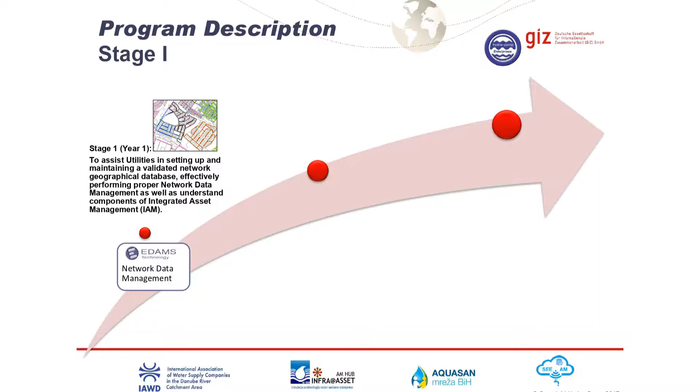So we have stage one, a number of utilities completed stage one. And what exactly did they complete? An initial assessment we did, setting up on the cloud, data collection, dissemination, and monitoring and control. So what we've done, we took GIS data and we converted them to EDAMS.

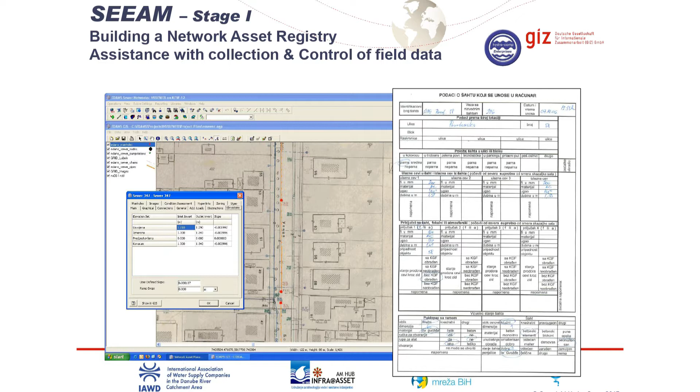We assist them through the hubs to the collection of field data or conversion of any kind of graphical data. This is a nice example from Kragujevac. It's a rather big and complicated network. Kotor is also a favorite. We continuously assist with resolving discrepancies, problems in the network, new data capturing, and so on, and providing monitoring and reporting on a weekly basis.

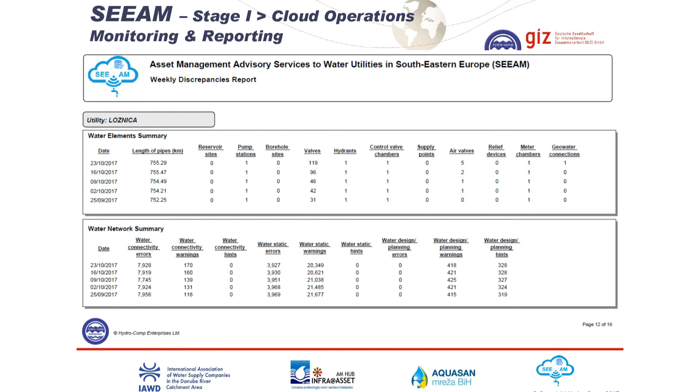So these are the topics that were basically covered in stage one: the cloud, the collection, discrepancies, and reporting. These are topics that have just been mentioned but not really covered in stage one, that being the zoning and the reporting manager. At some stage we will have to revisit them and say more about how to use the reporting manager, how to export data, how to utilize the zoning.

Zoning manager, reporting - very useful tools, to discuss further.

There are a few other topics we only mentioned but didn't cover, and I call them pilot topics. This is facility management and sewer networks. I heard some gentlemen mentioning sewer networks a bit earlier. Now let me clear it up. This project and the funding we have from GIZ is for water networks. It's not for sewer networks.

As an appetizer, just to explain that EDAMS actually works for both water and sewer, we asked some of the utilities to come forward so we could convert the sewer networks. But keep in mind there's a potential ToR extension, so we're keeping it on the back burner - perhaps over the next 1.5 years we'll come with a new proposal, with a new ToR, just for sewer and treatment works.

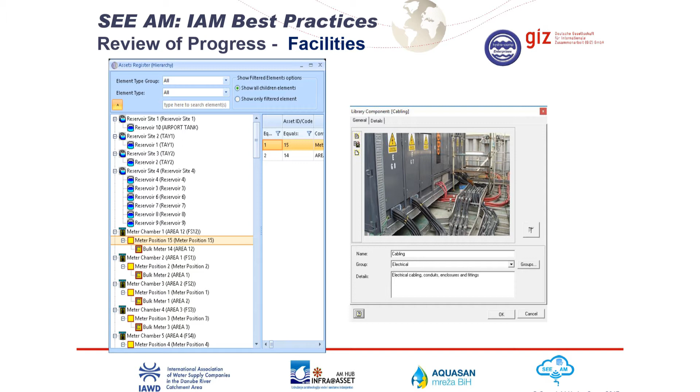Together with that, if we address the sewer, we have to address facilities. Facilities mean primarily treatment works - whoever has treatment works, and whoever has any kind of other facilities, and manages these facilities. So we see that as a package that hopefully will form a follow-up ToR just addressing sewer and facilities.

So one thing I want to tell you today is that apart from the project going on for the next two years, we're actively looking for ways to extend it. So we don't see it, as we explained to you in the past, as just a project. We see it as something long-term.

And long-term means that from our side, the service of the system will continue as you have it now, but that must go hand in hand with additional CD measures, trainings, and so on. So we will see what formula will convince our GIZ partners to extend the project. The sewer and the treatment plants are a logical follow-up.

It was mentioned by many of you. So yes, this is one potential avenue we're exploring, and definitely we're going to include it.

Facility management for us is very important, it's very big, and touches on another subject we haven't discussed at all, but we're going to discuss next year: municipal assets, because your assets belong to the municipality. So that might be a good opportunity to open another big discussion on how we bring in the municipalities and how they become actually part of the project.

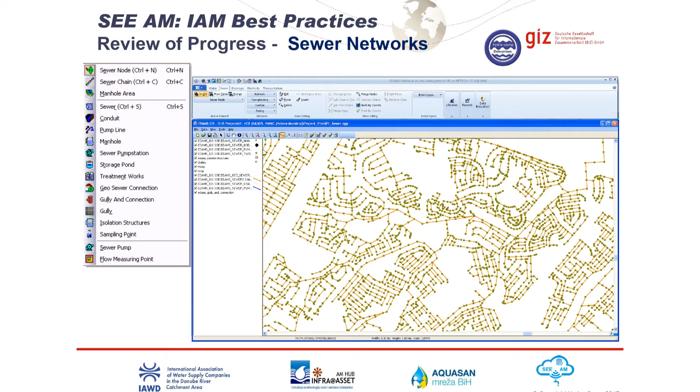And the sewer networks - okay, that is a synopsis of stage one. That's what we did in stage one.

That's what we would like to do, and that's what we have done. Then we come to stage two, which is the maintenance. And this was quite an ambitious stage that's supposed to cover all these things.

Now, I would like to say that maintenance is extremely, extremely important. There are a number of utilities that ask me, we don't like maintenance, we do what we do, just leave us alone. Can we skip to platinum stage and skip maintenance? The answer, in theory, yes. You could go from stage one to stage three because to set up a DMA, you don't need to have done maintenance. But it's not the correct approach.

You can't ignore maintenance. If we're going to do an asset management program ignoring maintenance, we're basically fooling ourselves, because the heart of asset management is maintenance. So to say that we're going to skip maintenance is not giving the right message, and also it stops what we want to do this year, which has to do with rehabilitation.

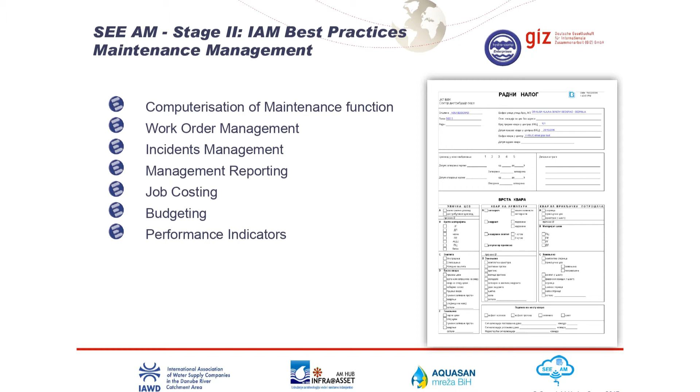But we had quite a tall order for maintenance, and some of you might be frustrated because you didn't implement as fast as you would like. It's a difficult topic for one additional reason: maintenance involves changing procedures on the ground, changing the way people do their work.

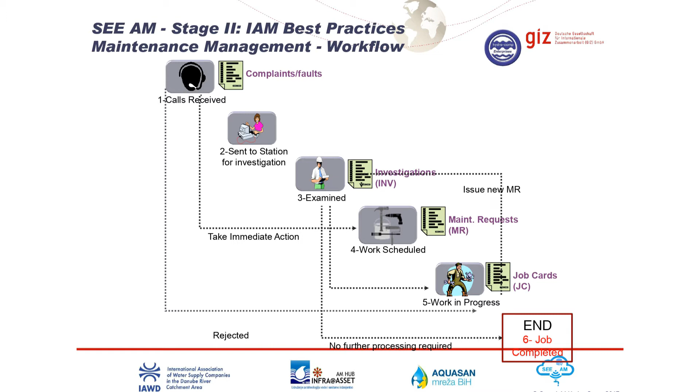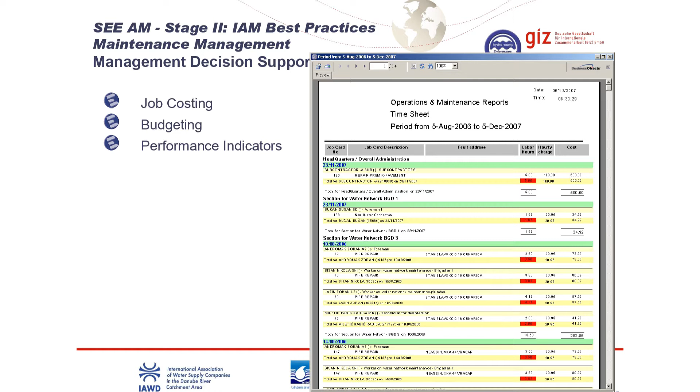I was recently in a municipality in Greece where for the fourth year, me and the director tried to convince everybody there to start using maintenance. That was déjà vu, we did exactly the same presentation, exactly the same thing for the fourth year in a row. So yes, it needs a certain attitude, it needs a certain management style.

It has to do with a lot of things within the utility which is not in our control. On top of it, you must know that these systems are implemented on premises or on the cloud. When implemented on premises, we come on the premises and we see what you're doing, and we help you replan your routines. On the cloud, we have no control whatsoever. We give you access to the system and, apart from some support, we hope for the best.

We don't actually actively get involved in the reorganization of your utility. We give you advice, we tell you what you should do, but we don't get involved. If you really want to enforce maintenance, the word is enforce, at least at the beginning, because there is resistance. Any kind of computerization that affects workflows creates resistance. Many utilities might be frustrated because they have a slow path to activate maintenance, but that doesn't matter. You have to be persistent and make sure these things are enforced.

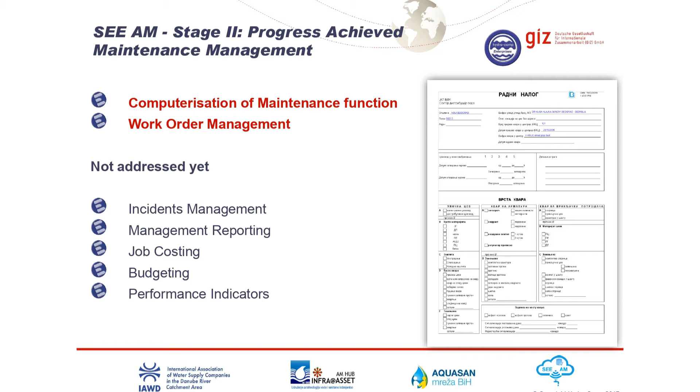The items we haven't touched so much: proper job costing, managing, budgeting, and performance indicators. We want to revisit these items. We haven't addressed them really because only now some of the utilities are starting to properly capture complaints and incidents and close the job cards. So this was maintenance management, stage 2, and we come to stage 3.

Stage 3, we introduced two aspects: non-revenue and operation. Now, I say introduced because for various reasons we didn't make much progress.

Some of the utilities are quite good, they're persistent, they have zones, and they're getting there. We expect that some of the utilities will manage to balance most of the zones this year, but it's an ongoing effort. This is the introduction - the two sides of it.

First of all, operations. We made an introduction that you have to capture all your logs. We want you to computerize the logs. That's something, again, we need to rediscuss. For utilities that have a lot of logs and capture them on paper or Excel, we want all of this to come into the system.

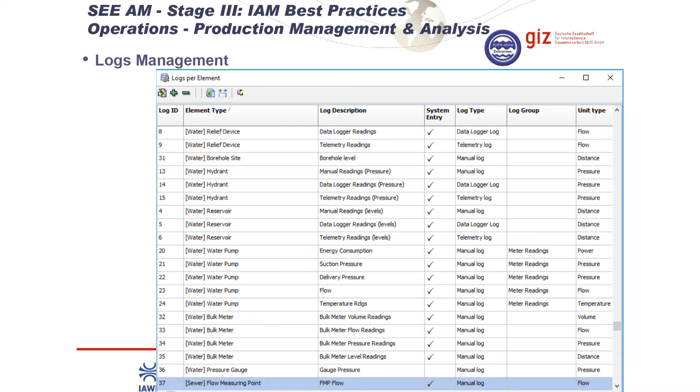We didn't have queries by any of the utilities on the issue. We would expect somebody to ask us how do I import this, how do I import that. We didn't get any feedback from anywhere, so I would assume nobody is doing anything about it.

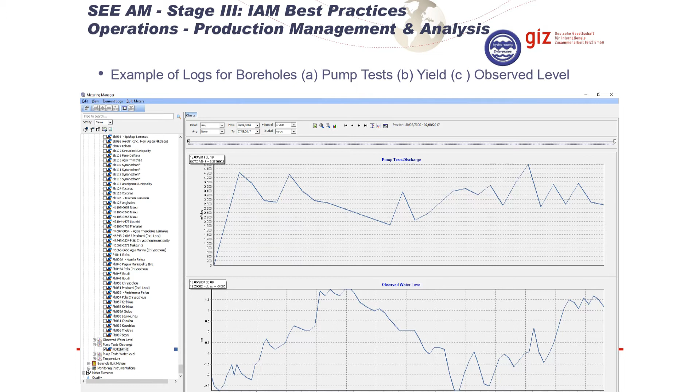Since everybody speaks about expectations, we also have some expectations. We'd like you to use the systems and make an effort to actually use the functionalities which will be very useful to you. This is some of the things you will be able to see and do.

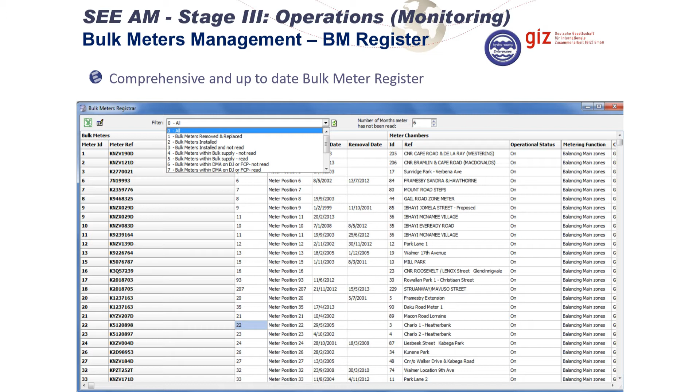Also, for bigger utilities, bulk meter management is an issue. There are utilities with 30, 40, 50, or 60 bulk meters. How you manage them, how you read them, and so on - it is an issue for these meters.

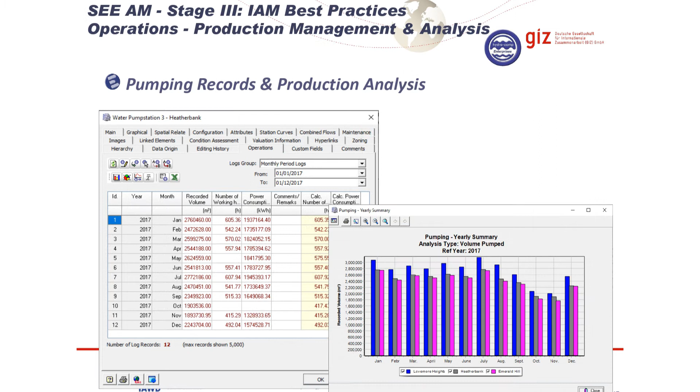Supply analysis per DMA, and records for production analysis, and so on - as I said, this part has not been addressed by any of the utilities. We didn't see anybody capturing any kind of logs. That means this year we have to discuss it again as part of one of the trainings.

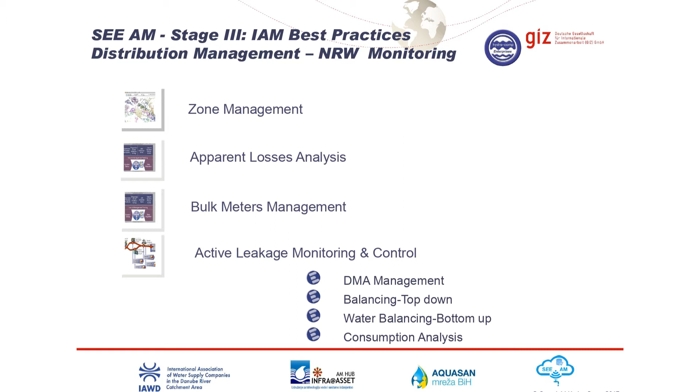And the next one, most important, non-revenue monitoring, which involves zoning, bulk meter management, and apparent losses. Now, what was the objective? The objective was simple: pick up a few zones and let's see if we can balance them.

We have the networks, we have all the meters, we have telemetry or meter readings, we have the billing - let's balance it. In theory, it's simple. In practice, it proved not so simple.

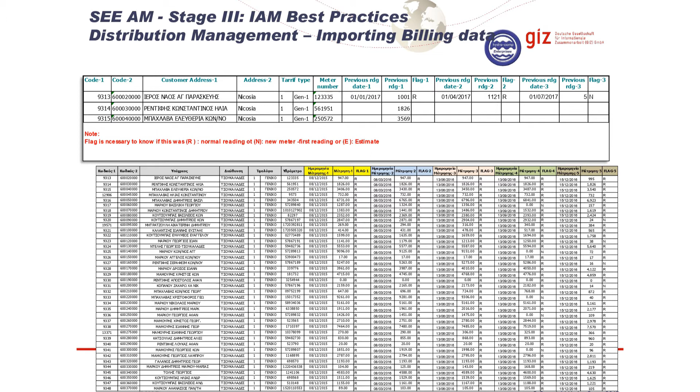Why? We started having problems, first of all, with the billing. We have a recurrent problem with the billing. For some reason, a lot of the utilities use a similar type of billing with coding and reference to the meters in alphanumeric characters and so on. That needs to be sorted out, not because of us, but because of best practices - that's the way you need to refer to meters. That is an important exercise that needs to be completed.

We discussed it also with Kotor. I don't know which other utility still has a problem. As an IT exercise, as I explained, it's very simple - a database expert can do it in a few hours. It's not something complicated. I don't know why some of the utilities are still stuck on it. If yes, we need to discuss. In any case, we need to be able to see the billing.

Because if we can see the billing and have GPS on the connections, then we're in a position to know exactly which connection is related to which pipe. So the zones work automatically.

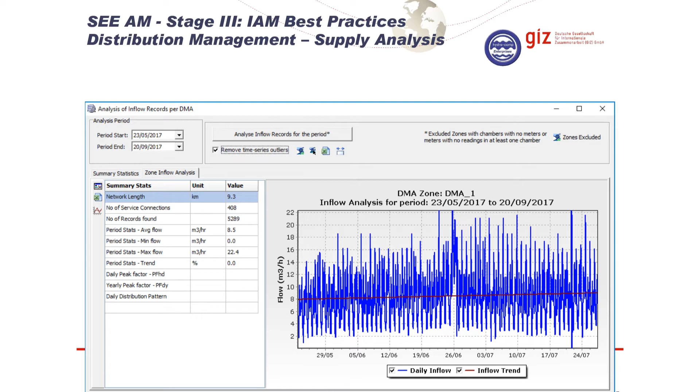So again, bringing in meterings from telemetry, we didn't see any of the utilities ask for that, to link to the telemetry.

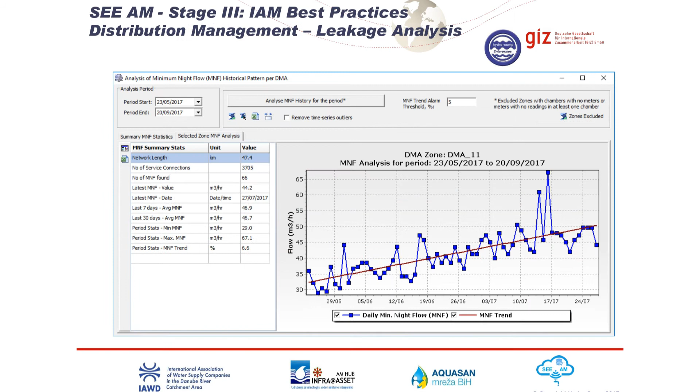What is the objective? The objective is simple: to get proper reporting, proper top-down and bottom-up IWA standard with all the indicators reporting on your status of non-revenue water per zone. That is the output, and this automation of the process is the first very, very tangible result of this 3 years' effort, to know exactly which zones have problems with non-revenue water.

And these are some of the reports we discussed in training, and that basically concludes what we've done the last 3 years. Now, not what we've done, but what we tried to do, because we haven't done it yet. So we introduced it, we explained when it's to be done. We understand this exercise will take time and persistence.

So I know all of you are asking, what are we going to do now? What are we going to do next year? Yes, fine, we're going to do things next year. But my question to you is, what have you done till now? I can reverse the question very well: have you balanced zones? Have you captured your operational records? Are you ahead with your maintenance?

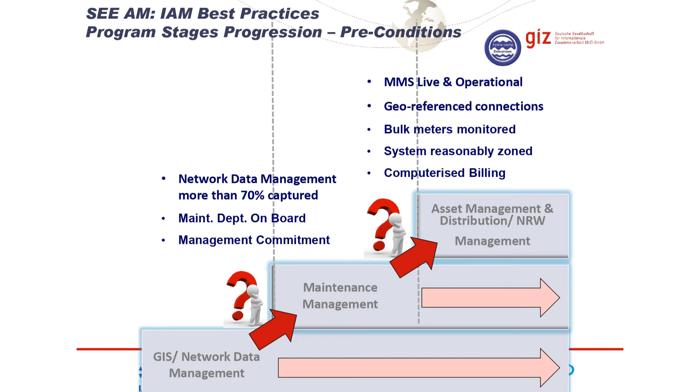This is a ladder that's going up, so hopefully going up. So some of the utilities might have questions - we presented that also last year. How do you move from stage 1 to stage 2? It's an obvious answer: if you capture the majority of your networks, if you think you have reasonably good data. When do you move from maintenance to asset management? There are requirements: if you have bulk meters, if you have zoning, and if you have georeferenced connections. So, if you think you're ready to actually balance your zones.

And again, I'm saying it again, we see this as a program, as a recurrent program, as an ongoing program. We don't see it as a project - not from our side anyway.

One of the changes we introduced this year, because it's also a recurrent issue, is in your contracts that we're going to send you very shortly next week. We don't want to go every year through this exercise of sign the contract, sign the contract, sign the contract. We're going to say that any utility's contract with us is recurrent, and any utility will receive a letter 60 days before saying the contract is being renewed. If you want to cancel it, you have 60 days to cancel it. So we don't have to go through this tedious procedure every year to get approvals, you to get approvals, and so on.

And it's a never-ending story, and that creates serious delays for us, because we end up starting the project with all the utilities sometime in March, April, which is a bit too late.